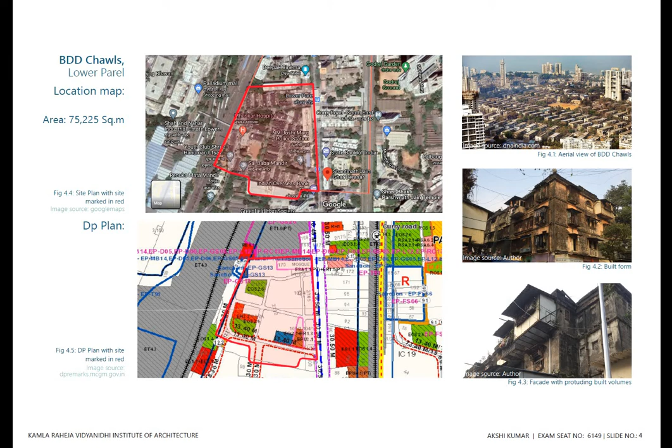The area comes up to around 75,000 square meters. The site study is done at 4 levels: the neighborhood, cluster, building, and unit typology.

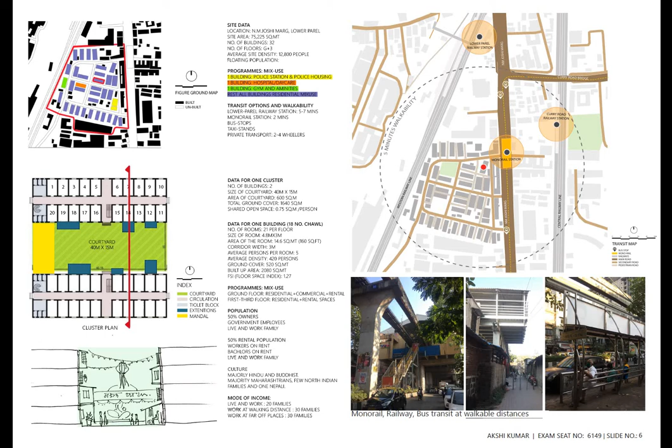The site houses around 2,400 families, and there are various transit modes at walkable distances. The unit typologies have developed over time due to the changing family system and modes of income.

There are various activities on site that are closely intertwined with one another throughout the built fabric. The programs have been derived by studying these activities.

The primary program is the mixed-use housing with the rehab and the sales component, and various community programs and shared spaces plugged in throughout the building.

The design development looks at conserving the essence and idea of the cultural spaces, shared spaces, and daily activities through design. Pleasure in shared spaces: shared spaces are multi-utility spaces such as the courtyard, and the pinda, which is the space around the tree.

The shared corridor creates a sense of community. It enhances the culture of sharing and caring among one another, and these common spaces are used throughout the day for various different activities - live and work.

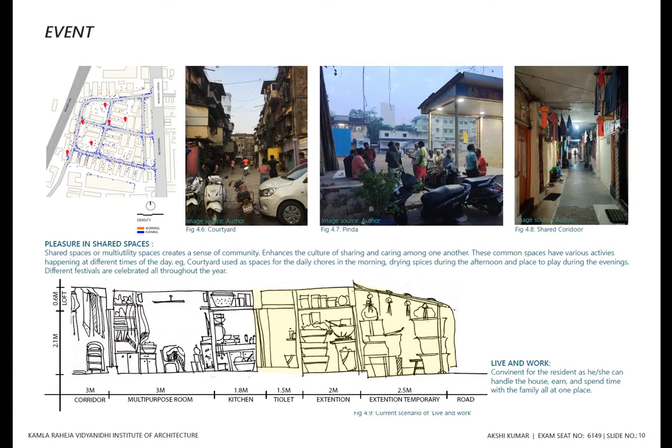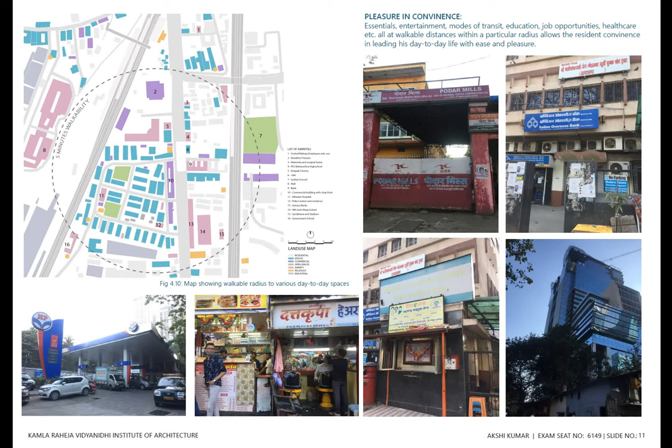It is convenient for the resident to handle the house, earn, and spend time with family all at one place. Pleasure in convenience: essentials, entertainment, modes of transit, education, job opportunities, etc. are all at walkable distances within a particular radius, which allows ease and pleasure in leading day-to-day life.

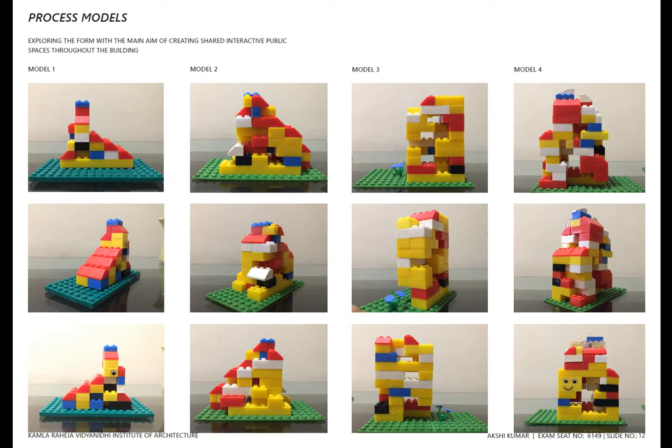I looked at various process models where I was exploring the form with the main aim of creating these shared and interactive public spaces throughout my building.

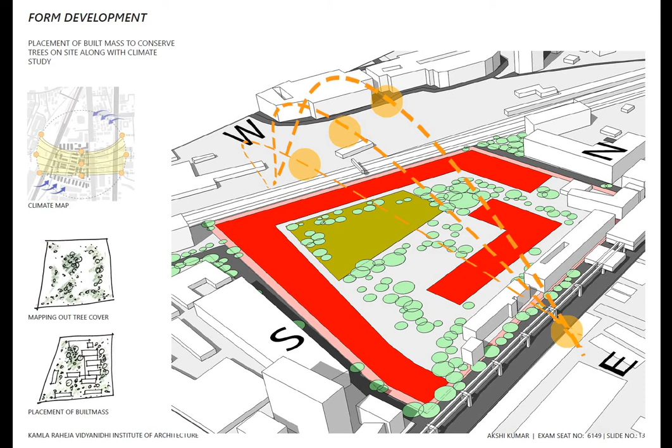The placement of the built mass is done such that to conserve the maximum amount of trees on site, along with the climate study. There are sloping roofs formed to create social interactive terraces.

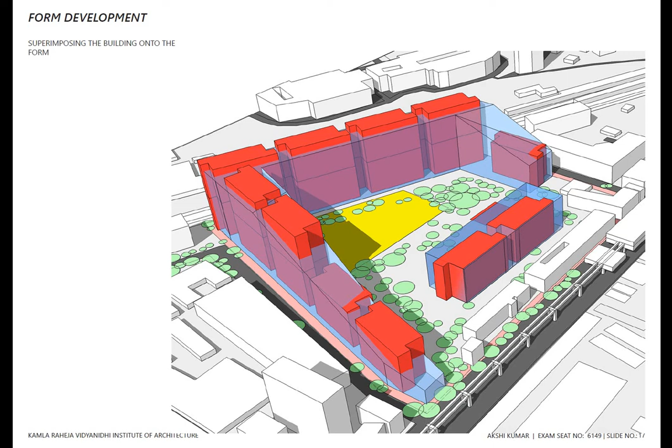The building is superimposed onto the built form. I'll explain the building further ahead.

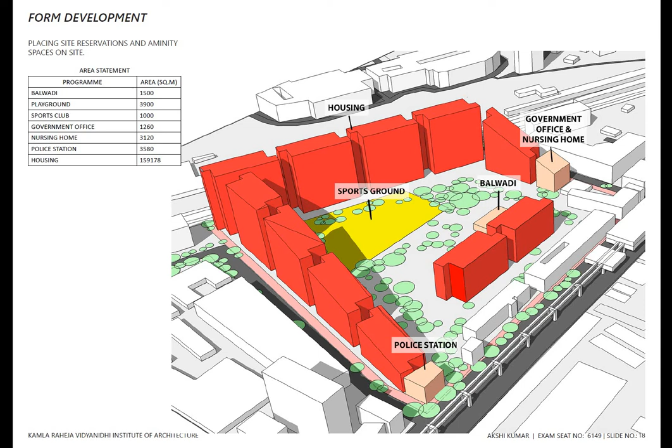Placing on-site reservations and amenities such as the sports ground, Balwadi, government office, a nursing home, and police station. The built-up area comes up to around 1,78,000, while the FSI is 2.7.

This is the built form where there are staggered terraces formed on the outside, while central public open spaces are formed on the inside. There is a separate rehab and sales block, such that there is a visual connect, yet the access and entry points are different.

The sales component looks onto the interior of the site, while the rehab components are placed on the outer periphery of the site.

Voids are created as spaces to create social interaction at various scales and levels throughout the building.

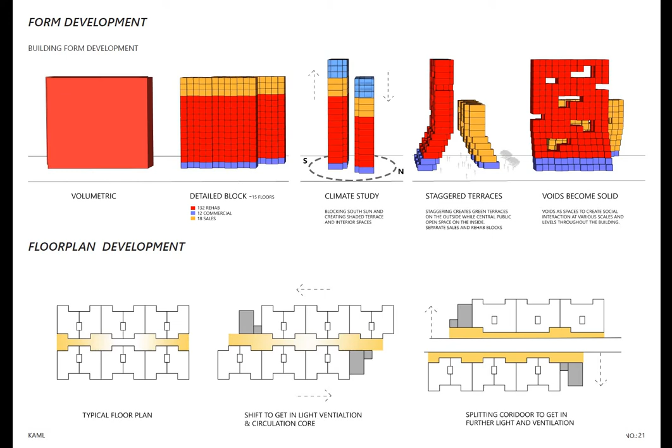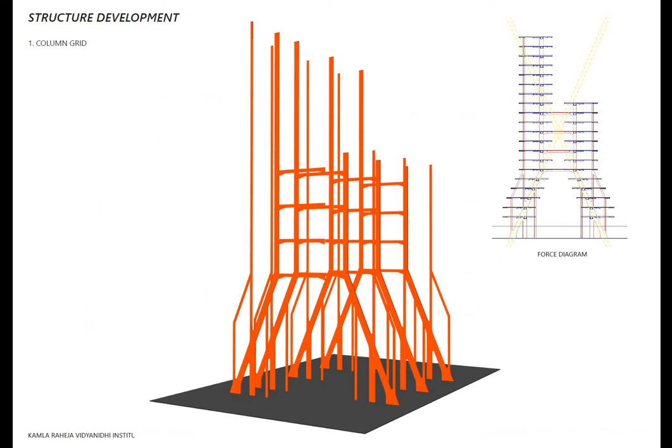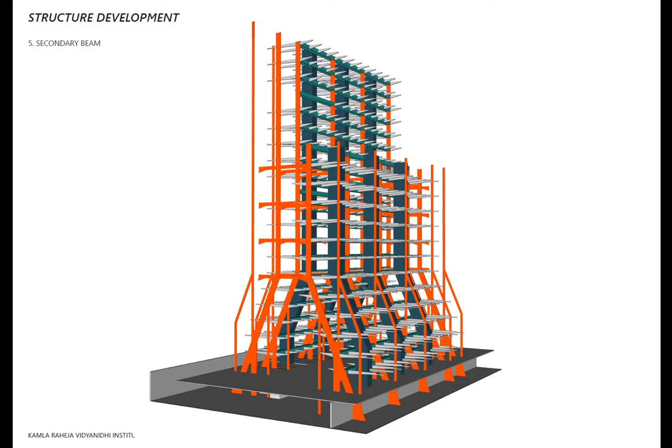The structural development: this is the column grid. Then comes the service duct, primary beams, basement, secondary beams, slab, the circulation block, and finally the elevation.

This is the master plan showing various on-site reservations and activities along with the social spaces marked in yellow, which become spaces for festival celebration and spaces as an extension to the commercial space, while the track marked in gray becomes tracks for jogging, cycling, etc.

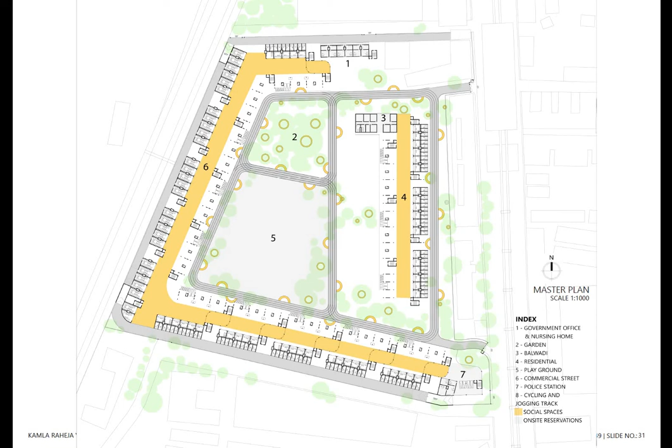This is the basement floor plan, where the parking requirement is for 150 cars for 150 residents. This is the basement floor plan for fire, ventilation, and drainage.

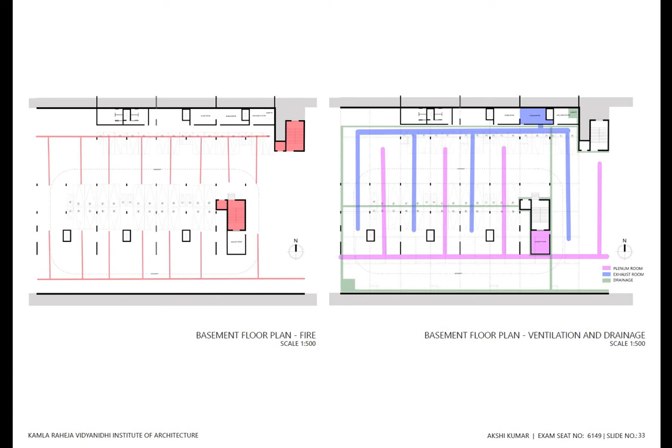This is the basement wall section, and this is a section cutting through the duct, showing various services.

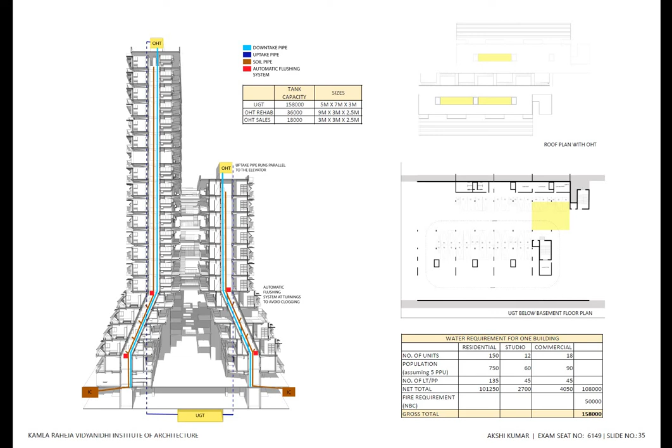This is the water requirement for one building, which comes up to around 1,58,000.

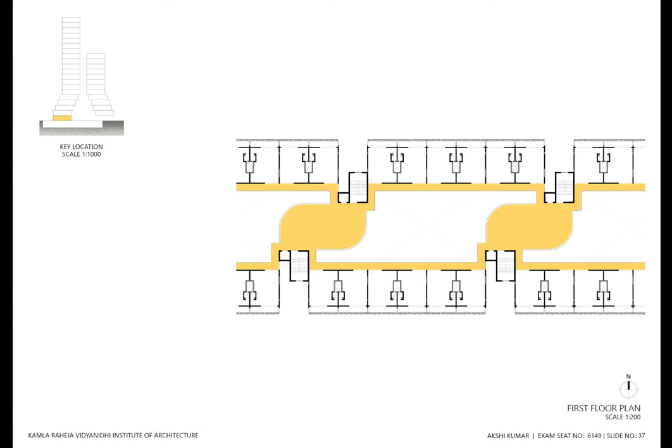This is the ground floor plan, where the space marked in yellow is the community or social space. This is the first floor plan, and as we go higher, the floor plans stagger up to the sixth floor.

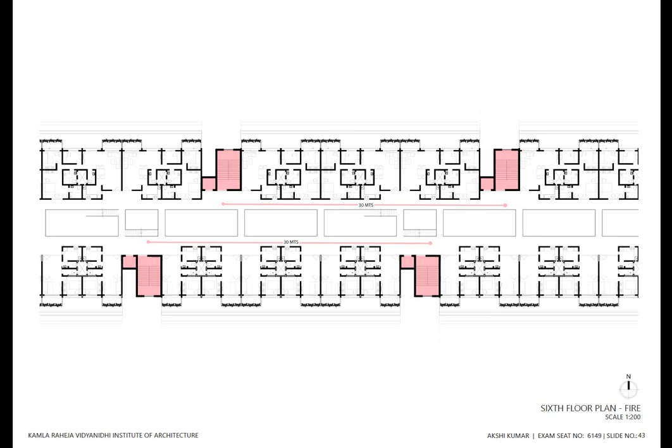There are structural ties that act as corridors or bridges between the two buildings, and there's a central staircase that connects the whole building throughout, both vertically and horizontally. This is the fire plan for the sixth floor plan.

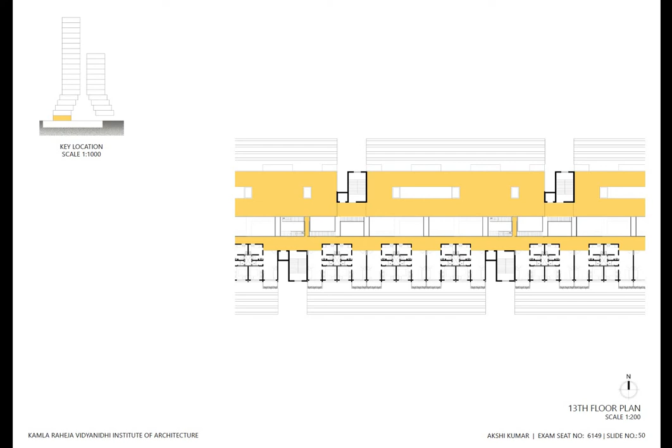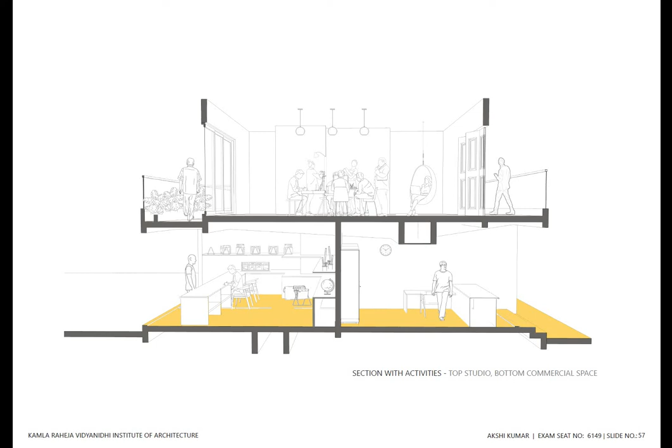The unit plans: this is the commercial unit on the ground floor, which is 29 and 16 square meters respectively. This is the studio office, and this is a section cutting through the studio at the top and the commercial spaces on the bottom.

This is a rehab unit, which is staggering and comes up to approximately 45 square meters. The unit plan development is done such that there is a balcony created on one side, while it creates a corridor pocket for internal activities to spill out.

The kitchen is placed in such a way that it allows socializing and exchange, and the collapsible doors allow for flexible use of the multi-utility space as an extra bedroom during the night, and as an extension to the kitchen, for live and work.

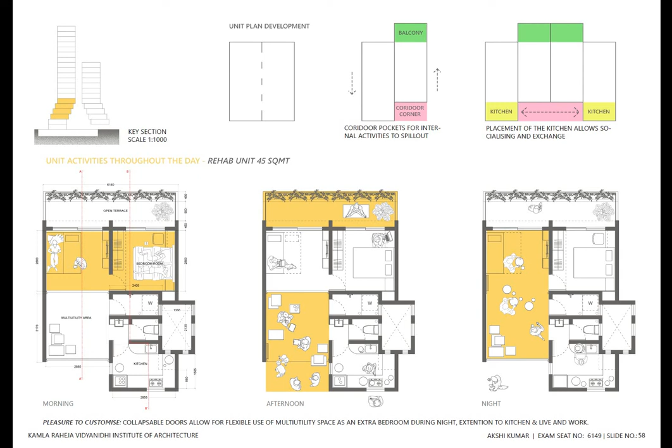This is a section cutting through the multi-utility area and the kitchen. This is a wall section of the staggered unit and the planter detail.

This is a rehab unit which comes one on top of the other. This is a section cutting through the same, and the wall section showing how the planter can actually be used as a space for sitting as well.

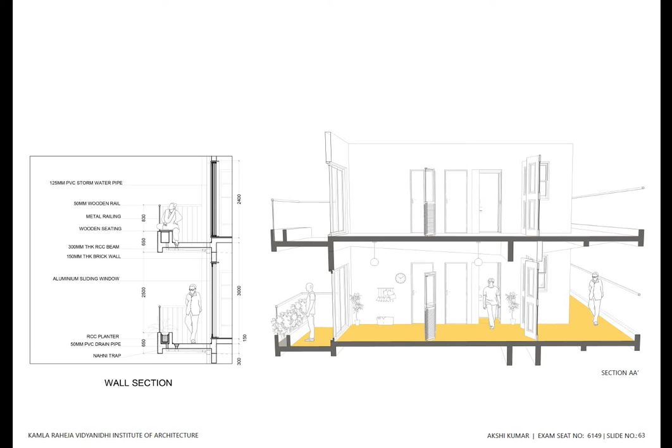This is a sales unit which is 97 square meters, and these are various activities throughout the day.

This is the sales unit which is placed one on top of the other. It is around 97 square meters, and this is a section cutting through the sales unit.

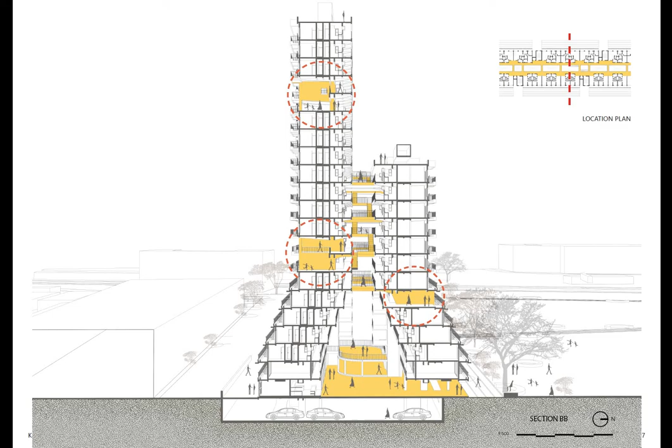This is a section cutting through various void spaces and social spaces throughout the building. Voids create interactive spaces for get-together events, spill-out, sitting, etc.

There are voids that have recreational spaces. Voids can house various amenities such as the gym, the daycare, the library, etc.

Double height voids have small windows overlooking the space below. There's this idea of eyes on street, which creates the possibility of social interaction.

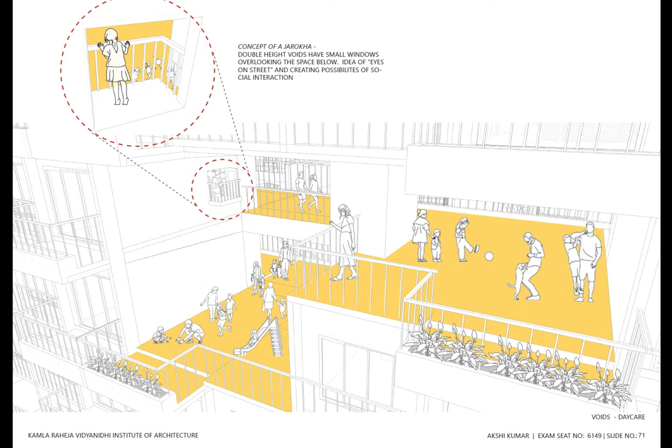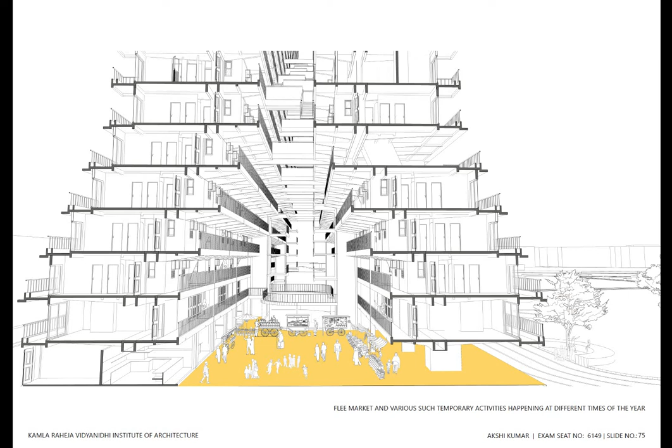It becomes a space to play and an extension to the commercial stretch, while it holds various temporary activities such as the flea market, and becomes a space to celebrate various festivals around the year.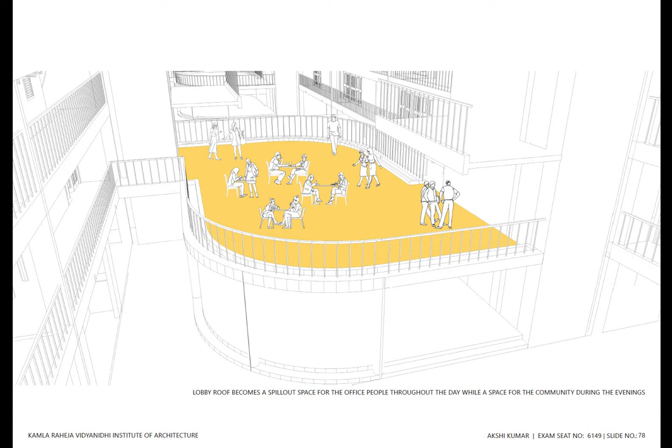The lobby roof becomes a spill-out space for office people throughout the day, while it becomes a space for the community during the evenings.

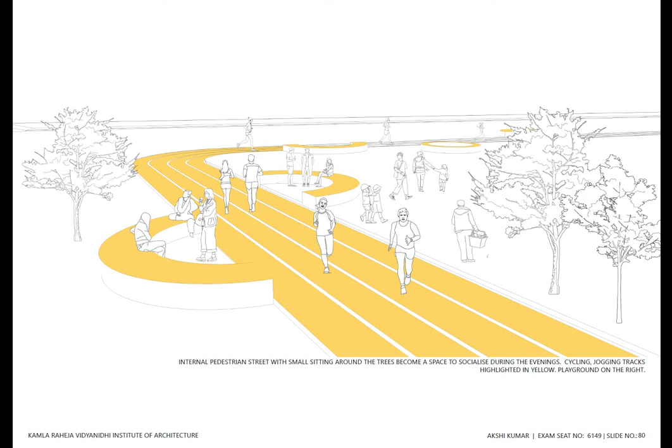This is the internal pedestrian street with small sitting spaces around the tree that become spaces to socialize during the evenings, while the track highlighted in yellow becomes a space for jogging, cycling, etc.

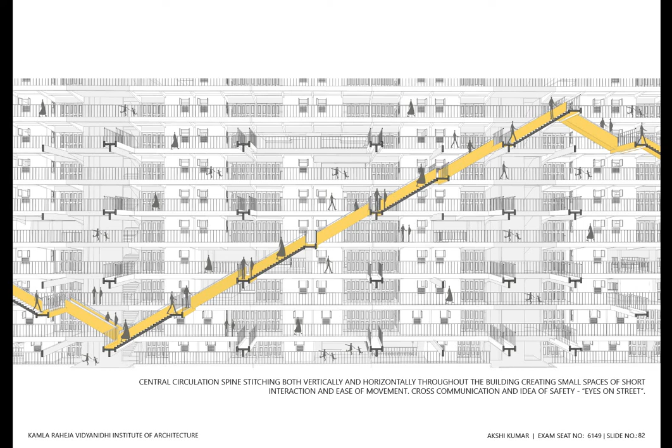This is the central circulation spine, stitching both vertically and horizontally throughout the building and creating small spaces for short interaction, ease of movement, cross communication, and the idea of safety.

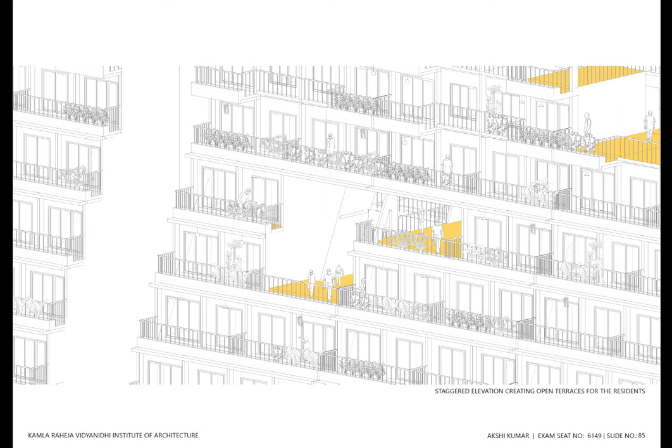This is a staggered elevation which creates open terraces for the residents, and this is the elevation between the 7th and the 20th floor plan with balconies.